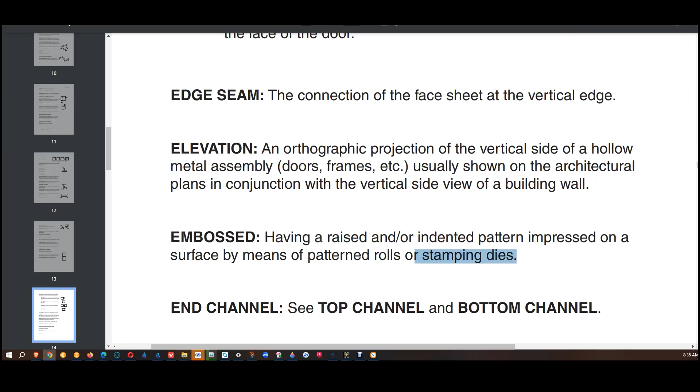Here's our definition. Embossed: having a raised and/or indented pattern impressed on a surface by means of patterned rolls or stamping dies. Yeah, absolutely. I'm quite positive you could do a wood grain type over a panel design. I'm quite sure of it, actually. So they would do the wood grain type effect, and then send it to the next tool, which will give you the panel design. We can take a look at Ceco, their catalog, which will certainly show embossed doors.

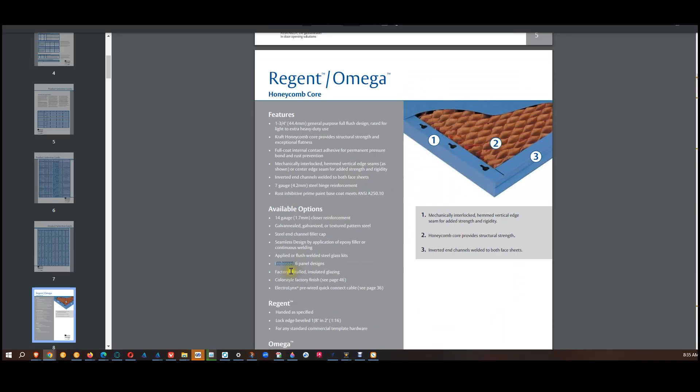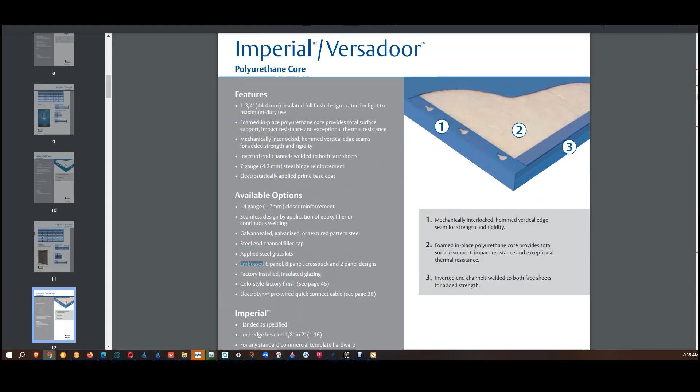Yeah, so in the Regent Omega, you can do an embossed 6-panel door. That's just going to be a 6-panel door. You can do in the Imperial Versadoor, 6-panel and 8-panel, a crossbuck, and 2-panel designs. Yeah, right there. Wood grain steel door. So this is both. There's literally going to be the steel going through those pinch rollers to leave the effect of this wood grain

feature. Admittedly, I'm not sure how they're getting horizontal grain here and here. See page 51 for designs. I don't know how they're doing that. That may be an effect of the stain that's put over it. Yeah, here's your crossbuck. They had mentioned that, 51.

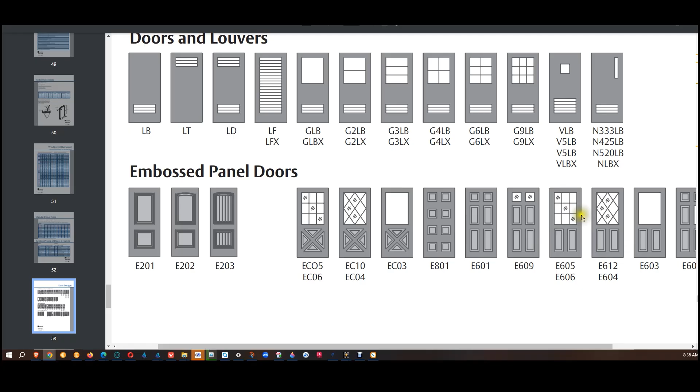Okay, embossed doors. So this will be the two platens that are punching that in the steel in these different designs. So every one of these is going to have a very expensive different tool set. Your crossbuck, the lights are just going to be metal vision frames. 8 panel, 6 panel, 2 light over 4 panel, 9 light over 2 panel, etc. Okay. You even see a 6 panel door with one of these panels cut out as a light. Not uncommon. That's what the design is going to look like there.

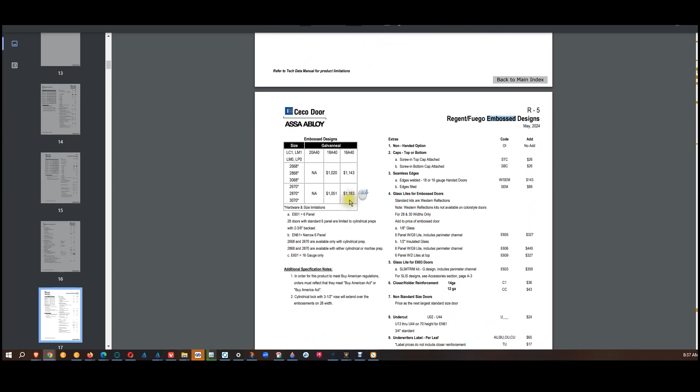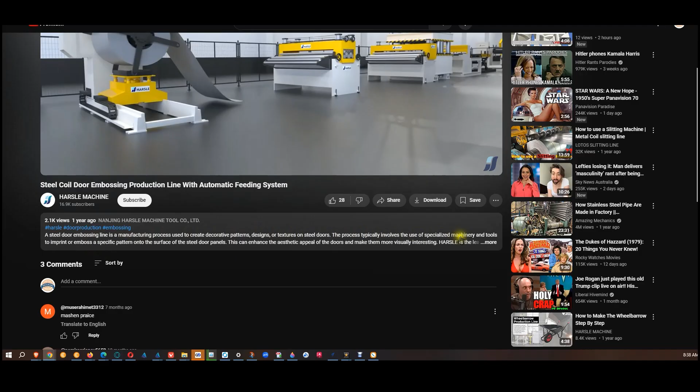Embossing. A steel door embossing line is a manufacturing process used to create decorative patterns, designs, or textures on steel doors. The process typically involves the use of specialized machinery and tools to imprint or emboss a specific pattern onto the surface of the steel door panels. This can enhance the aesthetic appeal of the doors and make them more visually interesting.

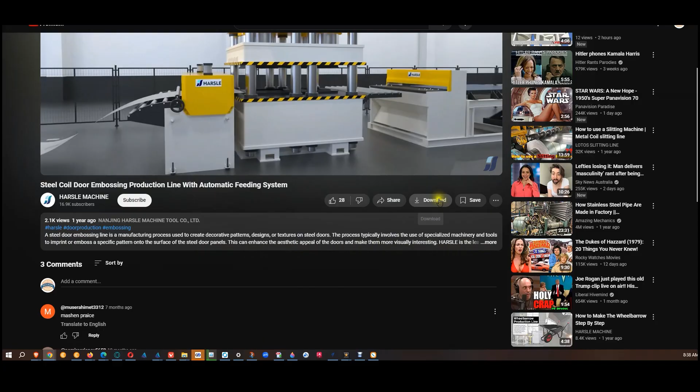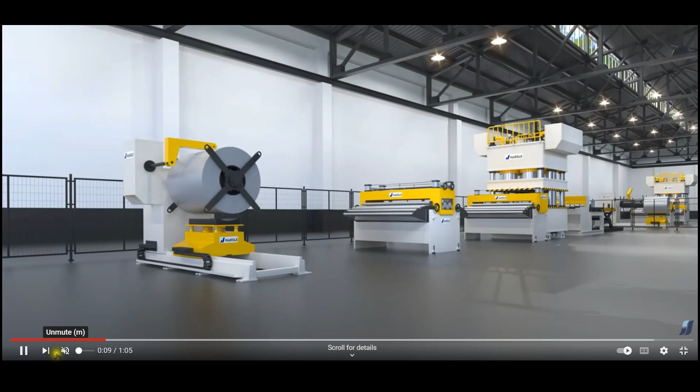Okay, awesome. This is a very short video. It's about a minute. Let's just watch it. Watch it happen. There is no sound with this. Well, actually, there may be. It's just music, so we're not missing anything.

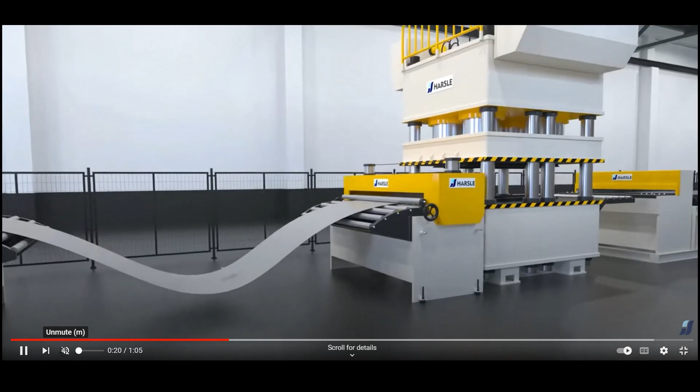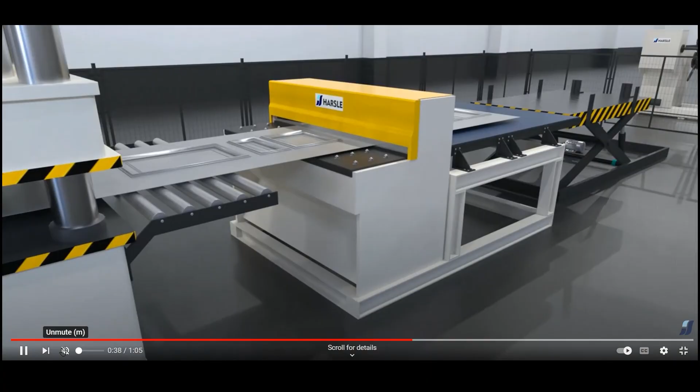Through the pinch roller, that's going to level it. There you go. And that's those 2 platens that will come together. Yeah, you can see the die set down there, and voila. Then they'll probably cut that to length. And that'll just keep going on all day long. And there's the shear. Yeah, you saw that knife come down. That's a shear. And there's a steel panel.

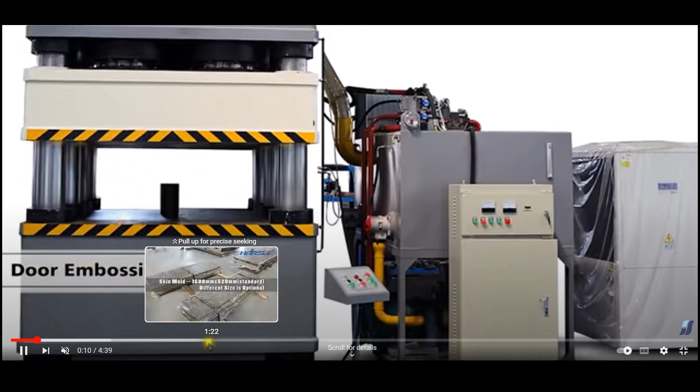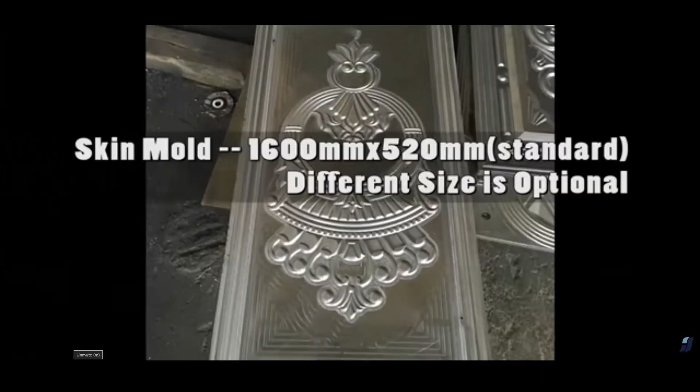That'll go to a press brake, I'm sure, to get bent over. That's a great example of what that looks like. It just really is. Let's see if we can find anything else. So apparently this company just makes the machinery for this. This is a much longer video. Yeah, so you're not going to see this in North American doors, but you can see what they do. This is probably somewhere in Asia.

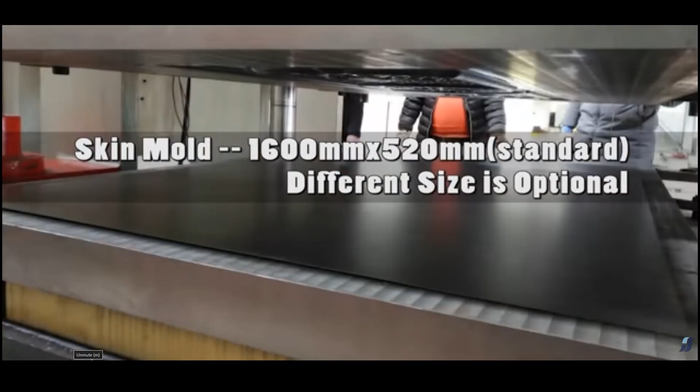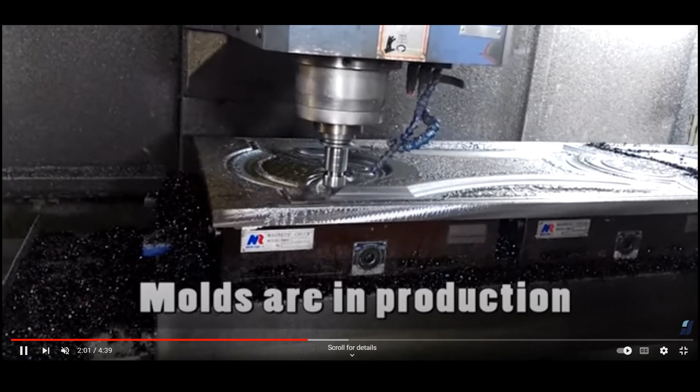Oh, they're CNC milling something. Oh, interesting. They were probably milling... They're making a mold that they'll make tooling out of, most likely. That's just CNC milling is all that is. Probably into solid aluminum, would be my guess. Not a big deal. That's going to be cold air that's being blasted on that. It's probably just cold air is probably what it is.

It's called a vortex tube, actually. It takes the ambient air temperature. This isn't the vortex tube, but it's probably up here. Turns it into a very cold air, because aluminum is a challenge to CNC mill. I have actual experience doing that. Lots of designs. Obviously, again, you're not going to see this, but we're talking about embossing. So here's embossing.

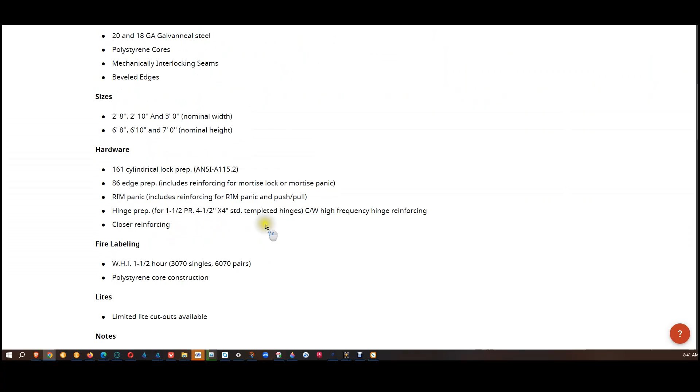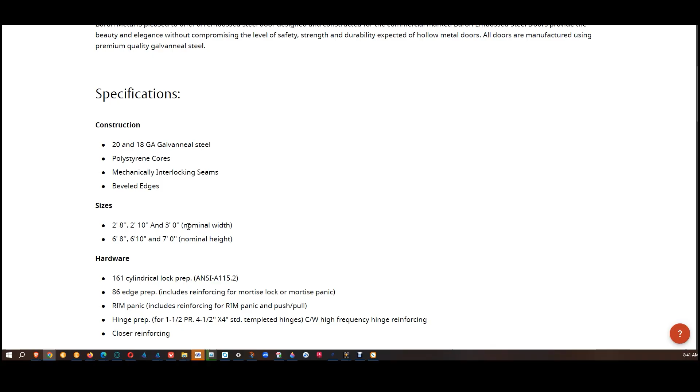How hollow metal doors are made. Okay, embossed. Baron metal doors. Baron is a Canadian company owned by Assa Abloy, and they do embossed doors, apparently. I've done lots of Baron doors through my Assa Abloy account. Really important to note that you're probably never going to see 16 gauge in an embossed or a panel door. You're probably never going to see like a 3/8. I know I've seen 3/6. It just gets weird because the stile width is so wide. They don't change the die or the mold for that.

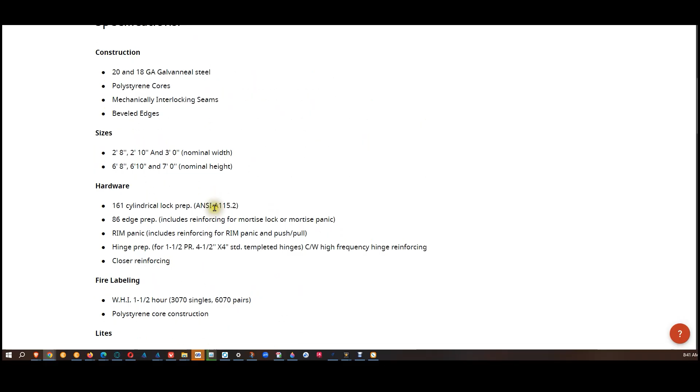But yeah, so they're telling you here, we'll do these widths and these heights, and that's what you're getting. So if you've got a mechanical door on each floor of the condo building, everything's 6-panel, and you want to do a 3/8/7/0 there, or a 3/8/6/8 more likely, I don't think today you're really going to get that. True Door, 2-panel embossed hollow metal door. Not sure if True Door is a manufacturer or a distributor.

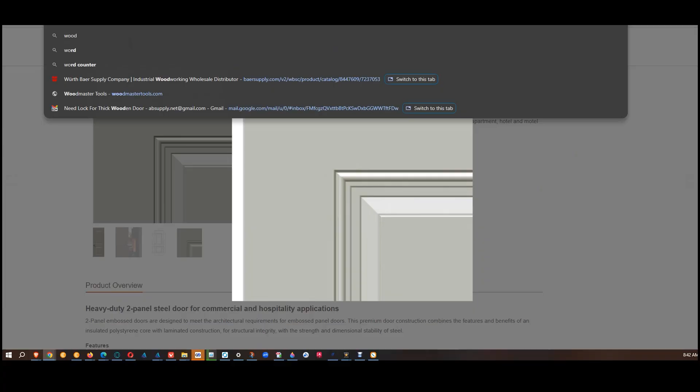And then the other problem is if you're doing 8/0, yeah, everything's going to get a lot taller. This top rail and the bottom rail will get a lot bigger. And then those details, that's all in the die set. All of these details that they have there, that's all metal that's been bent. All nice little detail there. Okay, that's embossing. Let's try one more. Wood grain hollow metal door. Let's just try images.

Okay, the next definition, end channel. See top channel and bottom channel. Yeah, lots to talk about that. Let's talk about that next.